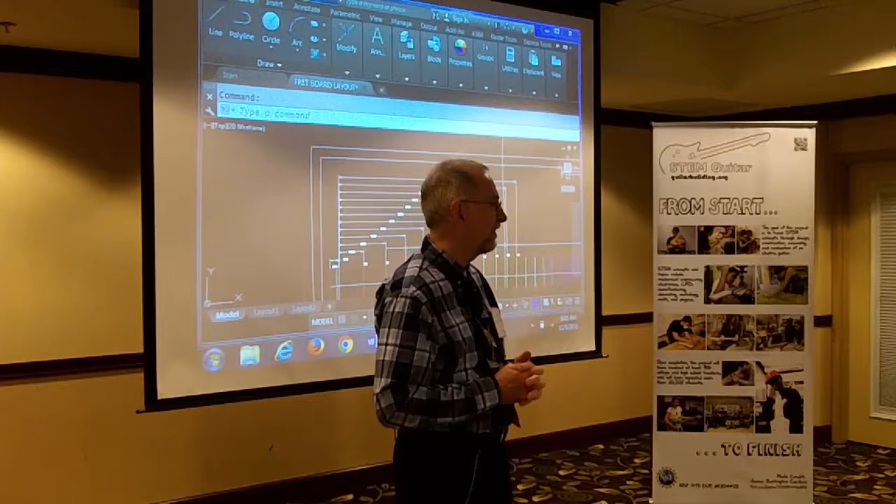So they were talking about doing presentations, submit a proposal, and I thought, lay out a fretboard with CAD, what would be better than that? So I write out the 75-word thing, send it in thinking I probably won't get picked. Get the confirmation email and going, oh, shoot, I've got to figure out something. And on top of all that, we have twice as many students as we normally do that have started our CAD program - it's a 1-year certificate training.

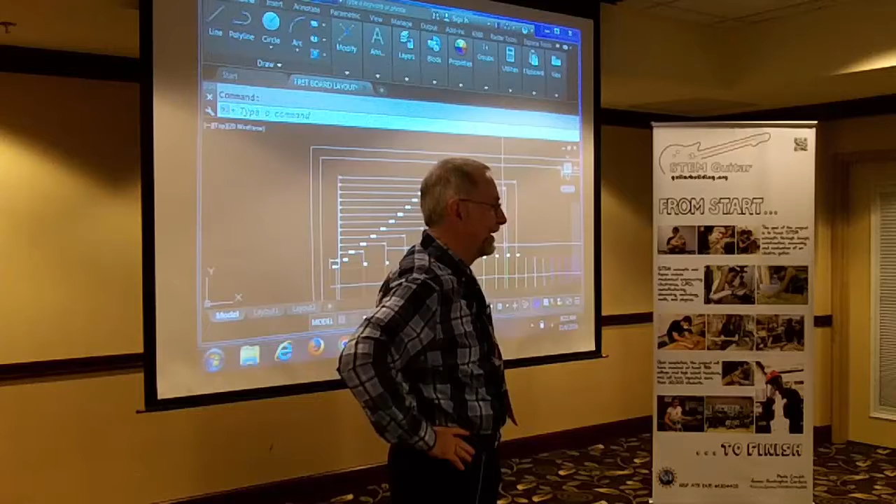Now, I did this in AutoCAD because I do AutoCAD. I've done some in SolidWorks, and I haven't done any in Inventor. But this could be applicable to any of that kind of stuff.

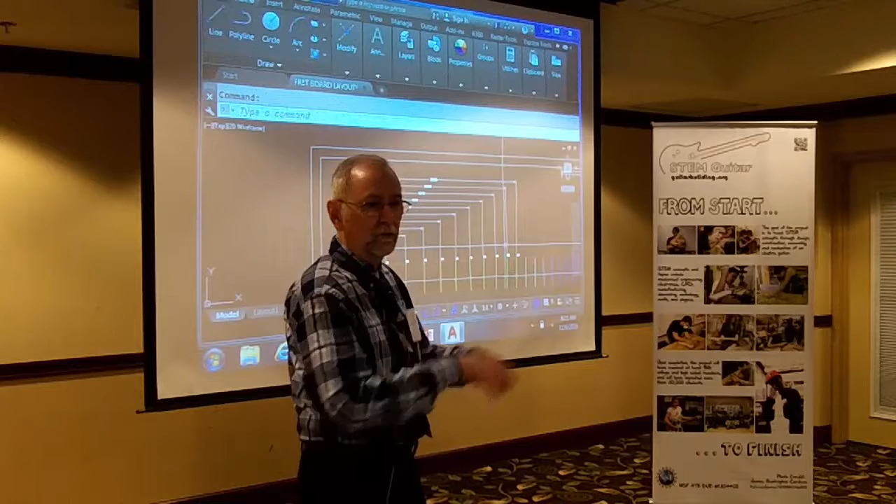You could build a 3D model of a fretboard. You could 3D print it if you had a big enough envelope - we don't with our equipment, so we'd have to make half size or quarter size little guitars. And I'm thinking, that might be kind of cool. You can do the body, you can do everything else, you can even do the strings if you really wanted to, I guess. And you can put all this stuff together as a 3D model.

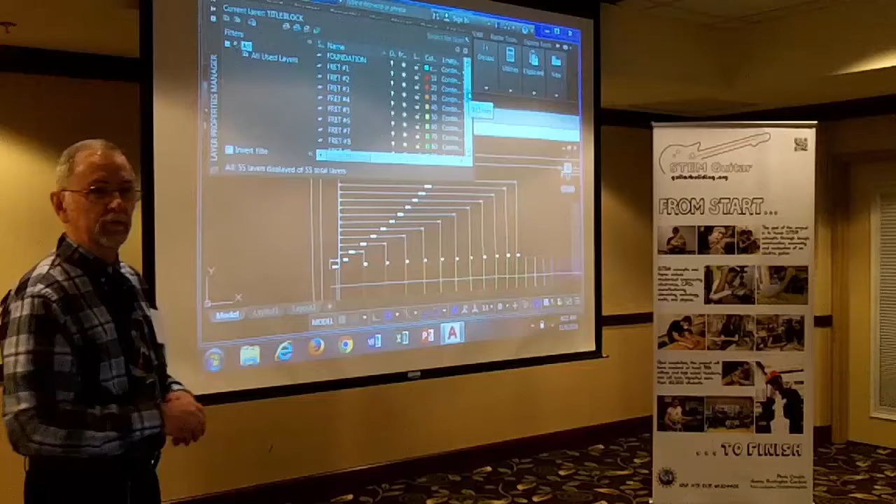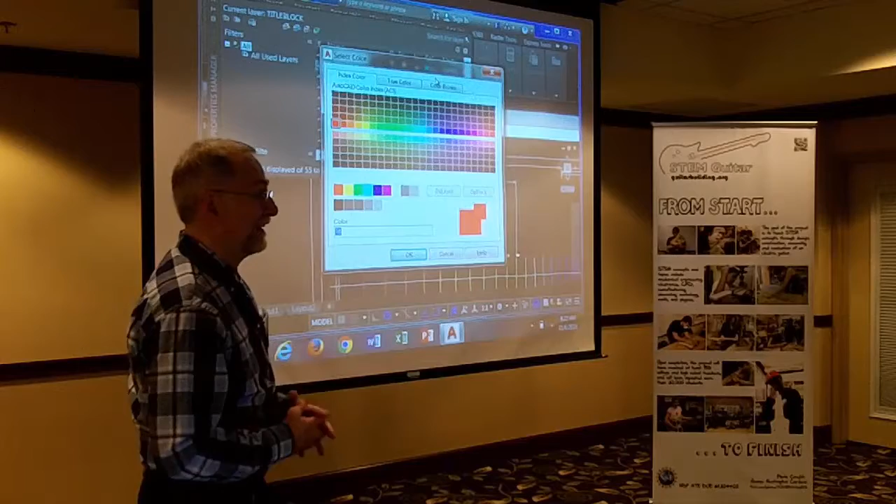So this is applicable. What I would do in a CAD situation is find my layers here. Yeah, it's showing up pretty well. I would go in and look at creating different layers. So I created a layer for fret number 1, 2, 3, 4, 5, 6, up through 21, and I assigned different colors. Basically, I just took the colors, and I started with 10, and I go, okay, that's fret number 1, 2, 3, 4, 5, and I created this rainbow effect. And I'm going, oh, that's pretty neat - maybe we could make rainbow colored frets. Yeah, and that's how I did my assignments.

And you can talk about creating layers, you can talk about line weights, you can talk about all kinds of things in regards to the CAD drawing itself.

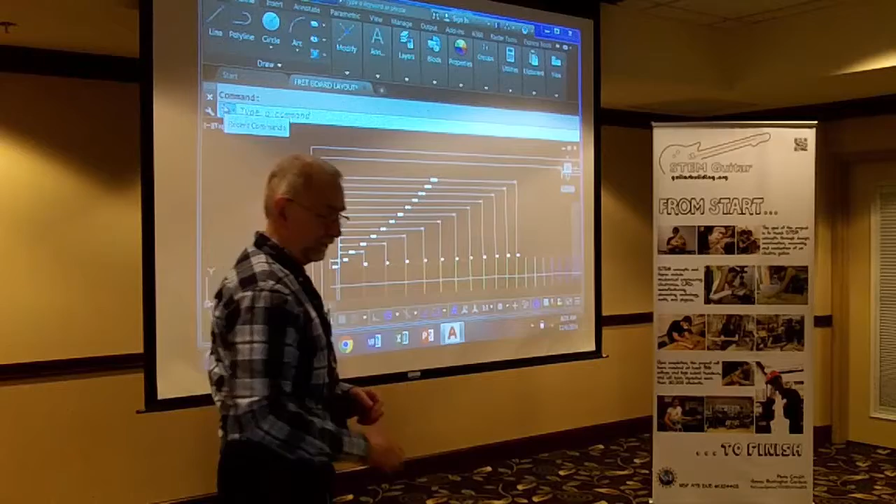And then I thought, okay, where do I get started with this whole thing? Well, obviously there's a fretboard, and obviously there's a metal scale. And I can measure what the size is at the top and at the bottom and the length, and I can create my fretboard, and I made it kind of brown looking. And then I can figure out, okay, I can measure out where the nut goes, and I can also talk about dimensioning.

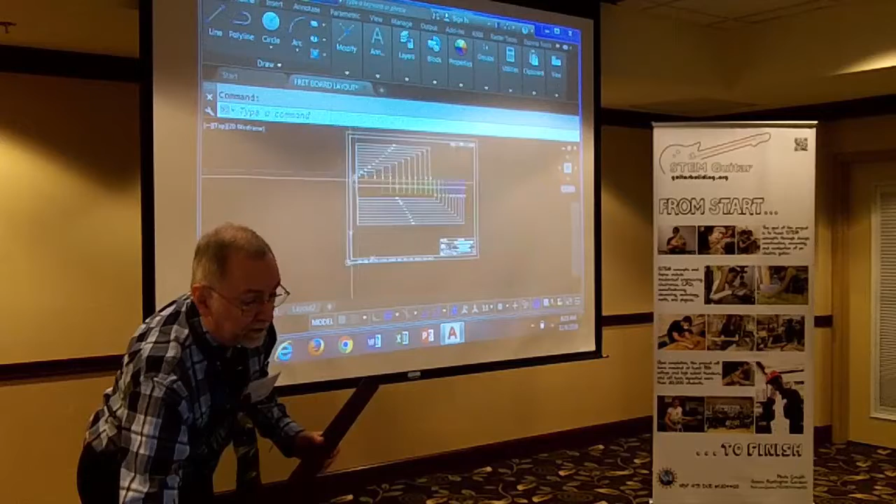Stop mouse. I can talk about text styles, I can talk about text size, I can make this full size, I can plot it out full size, I can plot it out at different scales.

There are all kinds of elements that I can bring into a CAD class, into a drawing. Ordinarily I teach one in the fall, but because we had so many students sign up, I had to take on a different class, and we basically had to cancel an introductory CAD class. I'm thinking, man, this would be great to try this out, but I didn't get a chance to do that.

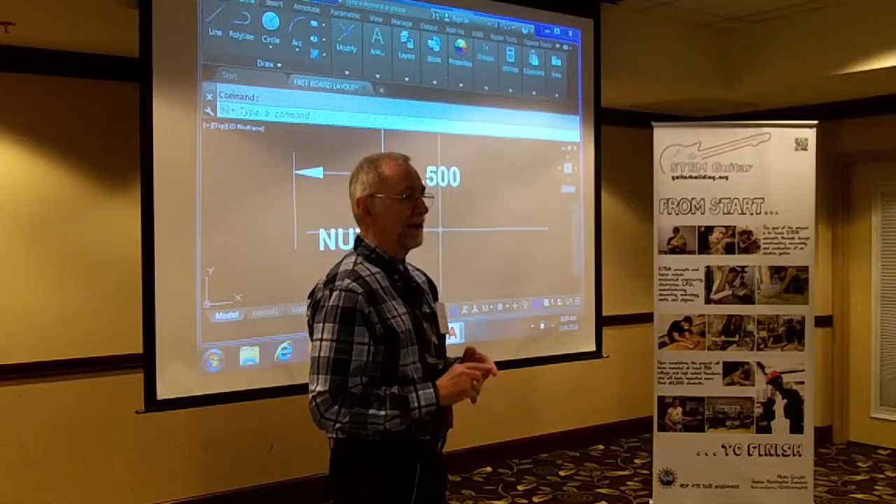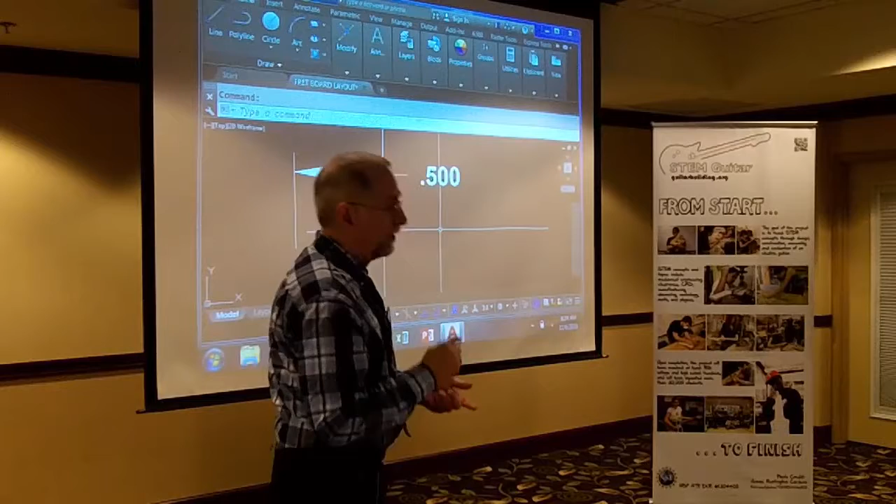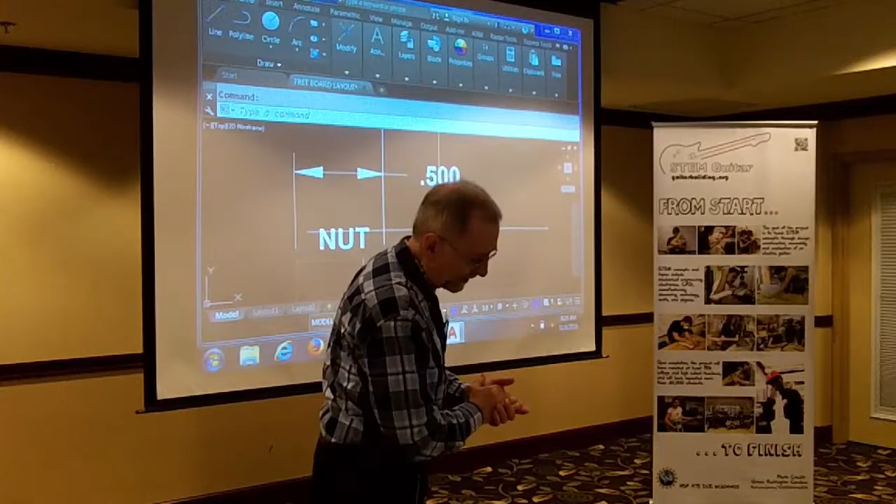But where do you go from there? Well, there was the formula that's on the guitar website for doing the math calculations to figure out what the fret spacing is. The first five were done, and then I figured out what the next ones were. I'm sure you could do an Excel spreadsheet. I'm not that technically savvy on that, but you could put in the constants. I used the 25.5 spacing and the constant of 17.817, and L minus D, five plus, or divided by, and then plus the previous fret spacing, all that.

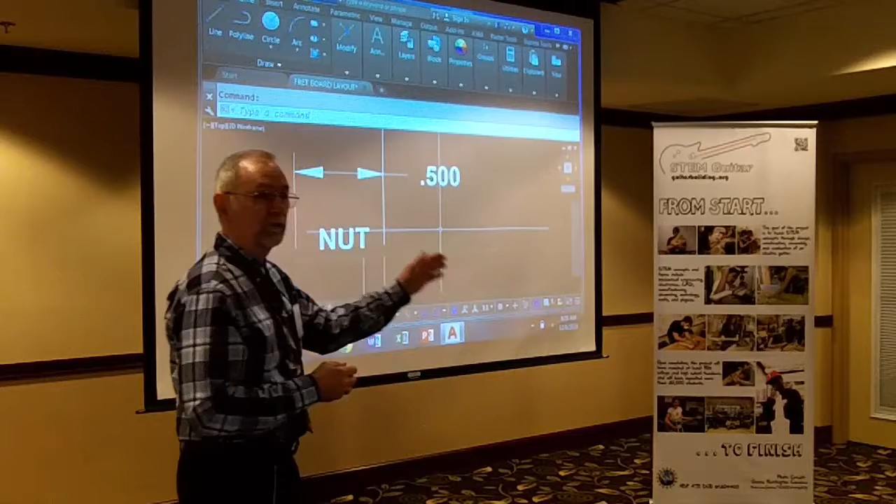And you could have them work that through, have them do the math and do the fret spacing. And then you just start using AutoCAD commands. You do offsets, is what I did. What I did was to keep track, not only with the colors, but I also put in text here to keep track of what the fret numbers were. It would be very easy to lose track of what's going on.

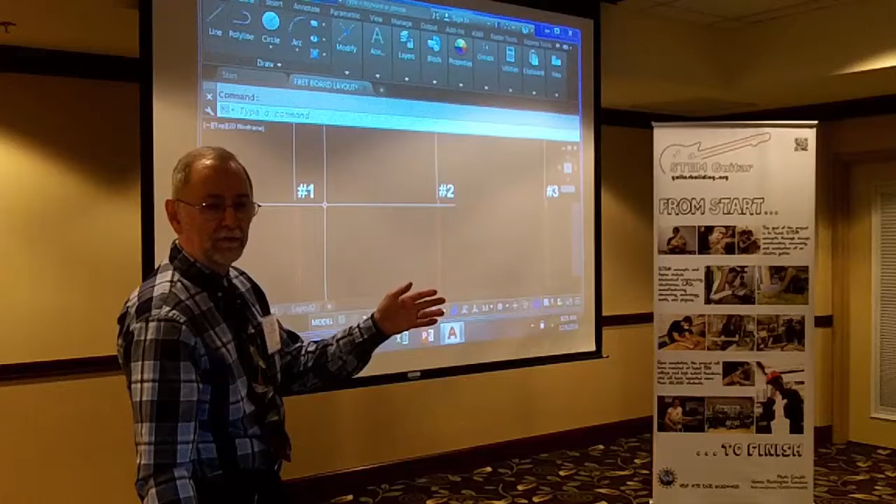So I kind of did them individually. I figured out one, did an offset, figured out the second, on up to 21. And then I go, okay, what's the gap? I didn't have a fret that was not in a fretboard that I could measure with a micrometer or anything, so I looked up a couple things with a Google search. What's the gap for a fret? Anywhere from about 0.023 to 0.024 to maybe 0.020. So I just kind of put 0.024 in there and figured that's close enough.

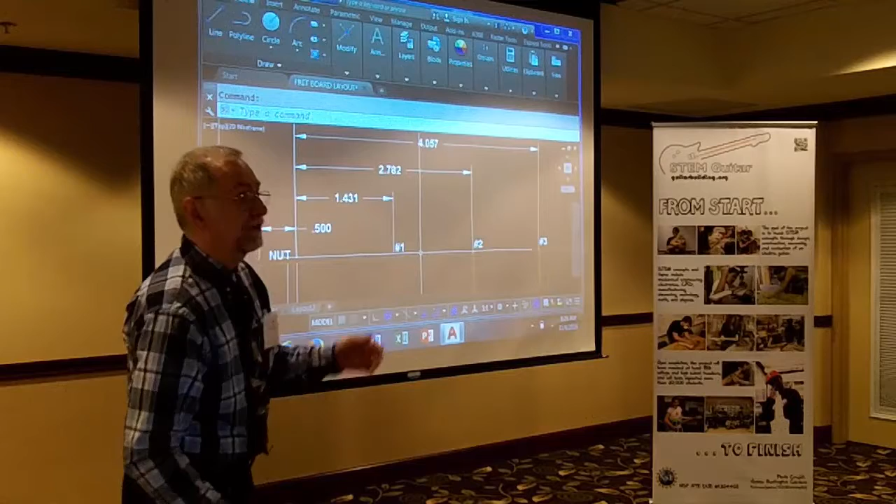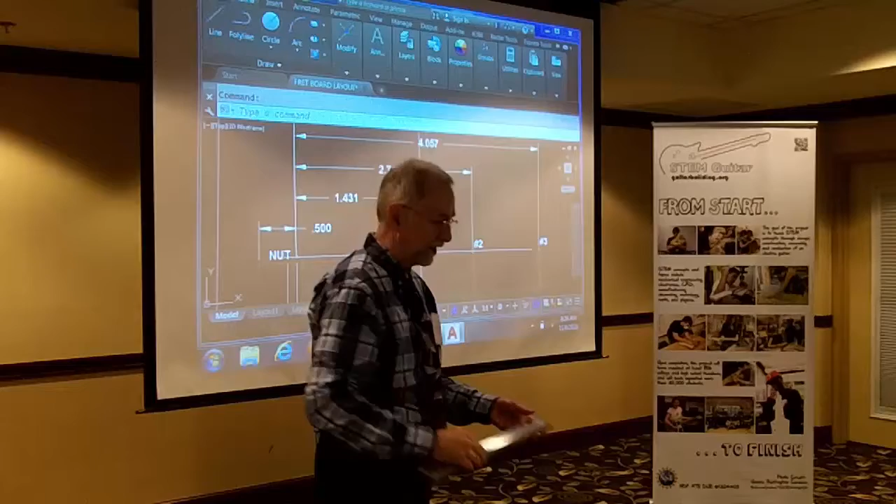And then I started dimensioning. So if you look at the calculations for the fret distance for fret 1, it's going to be 1.431. So I looked up the decimal equivalent, took my scale, went from the nut, went down here, and I'm going, yeah, by golly, that's pretty doggone close. It's close enough for me, close enough for what we're working on. And I kind of verified everything as I went along.

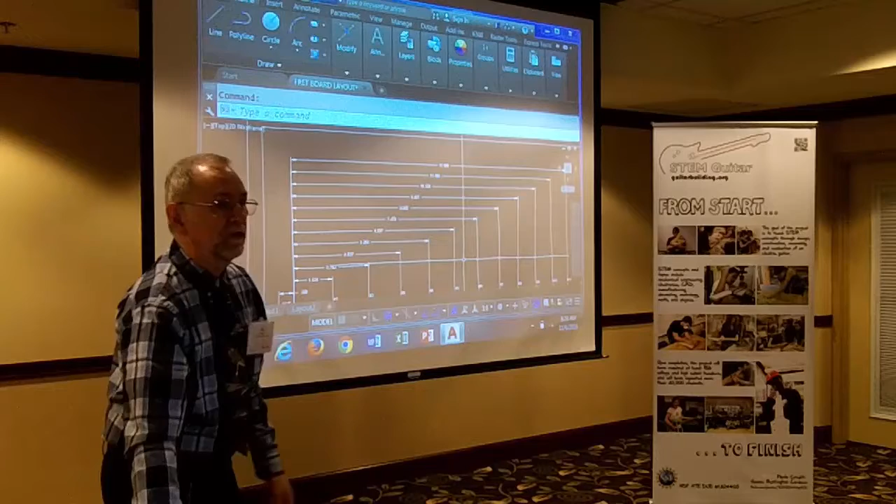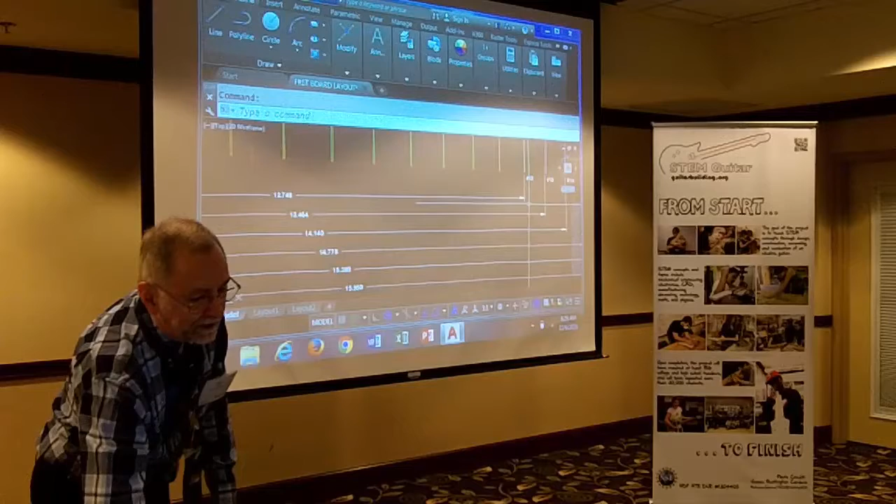So there's all my dimensions. You can do baseline dimensioning. I just put in linear dimensions from a point. And then I thought, well, I'm getting pretty crowded in here for my demonstration, so I'm going to drop down here, and at fret spacing 12, I just started stacking dimensions in there. I made them equally spaced, and there's a couple different ways that you can do that.

All I did was an offset at that spacing, I think it was 3/8, and just snap to the endpoints. You can talk about snap to, snap the points, and there's all kinds of things that you can do in your AutoCAD talk that you're working on. But the rainbow spacing looked pretty trick.

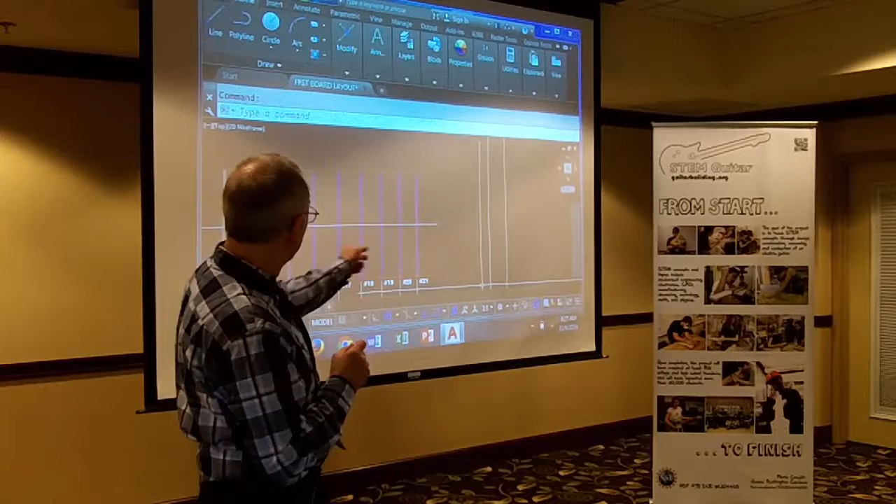And then I did the end view. I thought, well, it's got that 12-inch radius on there. What you could also do is, I didn't figure out what the actual depth was before I got here, but you could put that on the end view. It's a little hard to see the brown in here, but you could put that in, and then talk about how it starts out being a rectangle, and then you put this curvature on it. That's why you're taking that saw and making that curve a little deeper, so the height of that little T part on your fret comes down and gets the fret down onto the fretboard, so you can't get your fingernail in there like we did in our build.

So there's a lot of things. I left the center line in here, and Dustin was kind of talking about having the students lay out the fretboard, so you can put your lines in here and figure out where your fret dots would go, and do that for layout. That works as well. So there's a lot of things that you can do.

And again, you could turn this into 3D pretty easy, or just draw it straight in SolidWorks or Inventor.